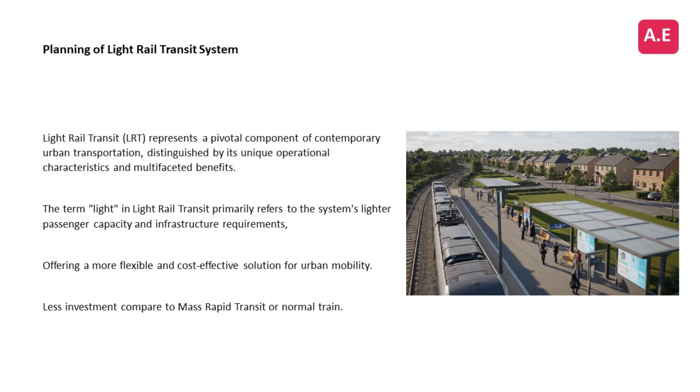Light rail transit, LRT, represents a pivotal component of contemporary urban transportation, distinguished by its unique operational characteristics and multifaceted benefits. Often described as rapid transit, LRT systems utilize electric-powered single cars or short trains that operate on fixed rails. The term light in light rail transit primarily refers to the system's lighter passenger capacity and infrastructure requirements, rather than the physical weight of the vehicles themselves.

This distinguishes LRT from heavier rail systems like subways or commuter rail, offering a more flexible and cost-effective solution for urban mobility. The historical roots of modern LRT can be traced back to traditional streetcar systems, which were common in the late 19th and early 20th centuries across Europe and North America. However, contemporary LRT is a redesigned evolution of these earlier systems, engineered for greater speed and capacity to serve larger metropolitan areas.

The concept of light rail as it is known today emerged in the United States in 1972, coinciding with a resurgence of interest in this mode of transport due to its environmental advantages and potential for urban revitalization. This modern iteration of light rail draws heavily from post-World War II German innovations, where many streetcar networks evolved into sophisticated light rail systems known as Stadtbahnen.

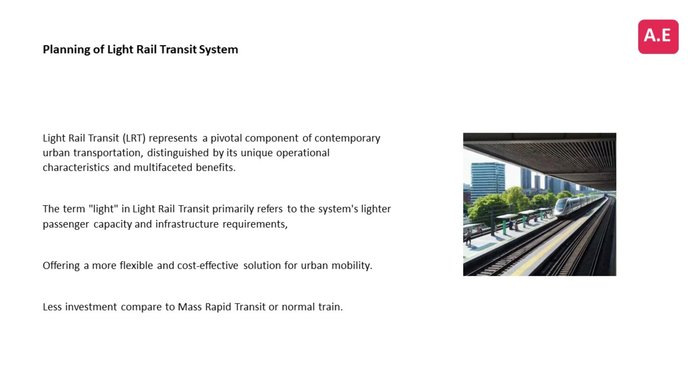The adoption of these modern LRT systems gained momentum globally, with the first of the new North American systems commencing operation in Edmonton, Canada, in 1978, followed by widespread implementation across numerous cities. LRT systems are designed to operate primarily on tracks, often in dedicated lanes separate from regular traffic, although some may run in mixed-flow streets. This dedicated infrastructure, coupled with features like special traffic signal systems, contributes to reliable travel times and smooth, comfortable journeys for passengers.

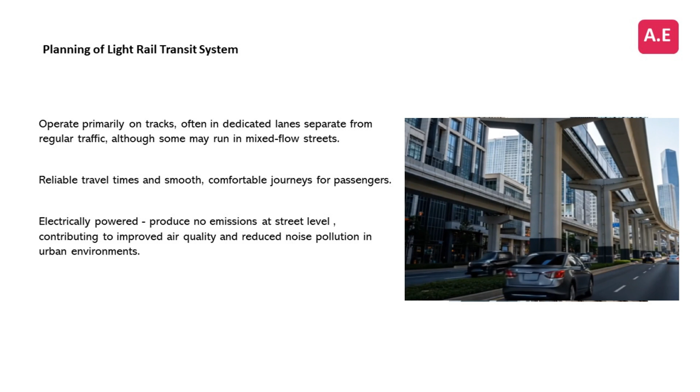Being electrically powered, LRT vehicles produce no emissions at street level and operate quietly, contributing to improved air quality and reduced noise pollution in urban environments. These environmental benefits, combined with their ability to reduce traffic congestion by attracting riders from other modes, underscore LRT's role in sustainable urban development.

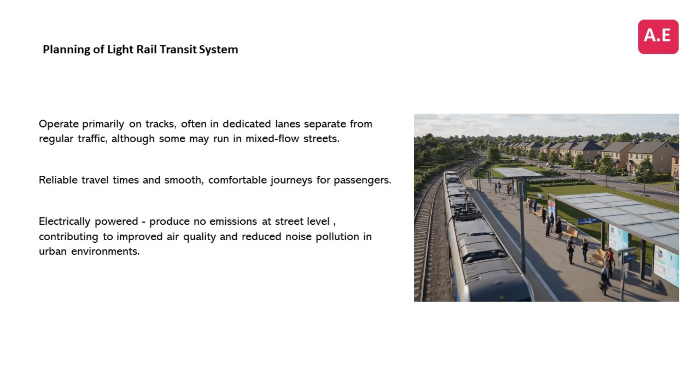From an economic perspective, LRT offers a cost-effective public transportation solution for high-volume corridors, requiring significantly less investment than highways, heavy rail, or commuter rail. Its capacity surpasses that of buses, including bus rapid transit, making it an efficient choice for moving large numbers of commuters. Beyond transport, LRT projects consistently stimulate local economies by promoting economic and land development along their corridors and around stations.

This includes enhancing property values and fostering mixed-use development, thereby contributing to urban regeneration and community interest. Furthermore, LRT systems improve mobility and accessibility for a diverse range of users, including those with mobility impairments, through features like low-floor vehicles and accessible stations, thereby promoting social equity and inclusion.

With over 400 cities worldwide now utilizing LRT systems, their proven track record highlights their critical role in creating attractive streetscapes and integrated urban transit networks.

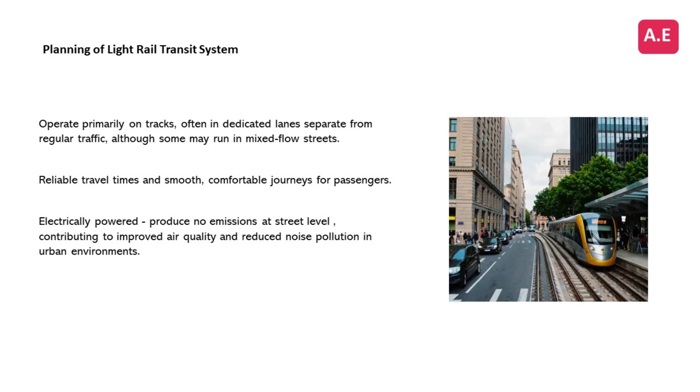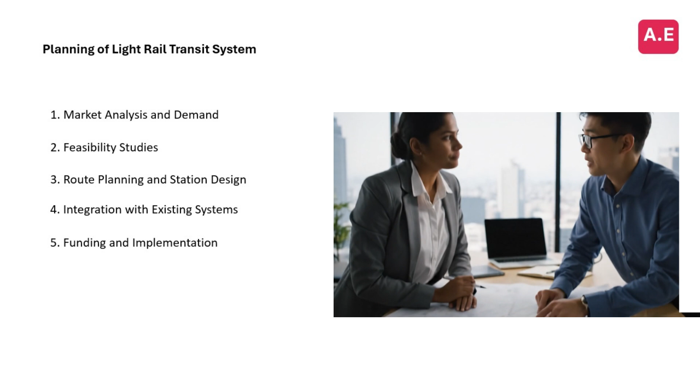The planning process for a light rail transit system is a comprehensive, multi-stage endeavor that lays the foundation for a successful and sustainable transit solution. It begins with an initial planning study aimed at determining the feasibility of the proposed system, structuring the project, and identifying necessary local commitments and funding availability. This preliminary phase is critical to ensure that the project aligns with community needs, financial realities, and technical possibilities.

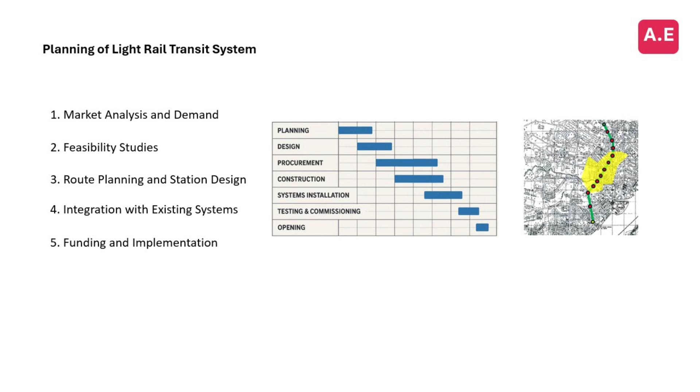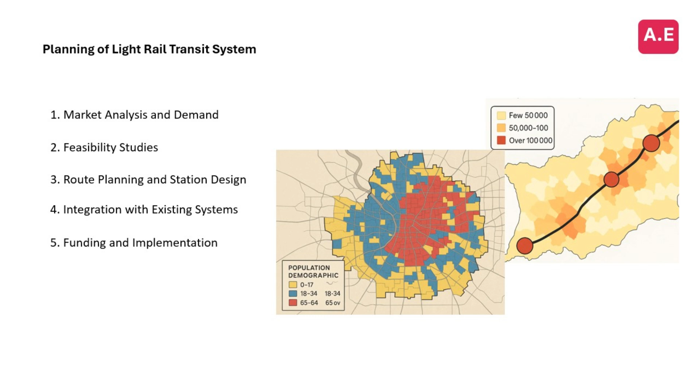A key early step involves conducting detailed feasibility studies and route planning. This requires assessing the demand for LRT services by analyzing population density, demographics, land use patterns, and existing transportation infrastructure. Environmental and social impacts are also evaluated to minimize negative consequences and enhance community benefits. Cost and funding options are explored to ensure economic viability. These studies help identify potential corridors where trips cluster in linear travel patterns, known as travel sheds, which are ideal for LRT implementation.

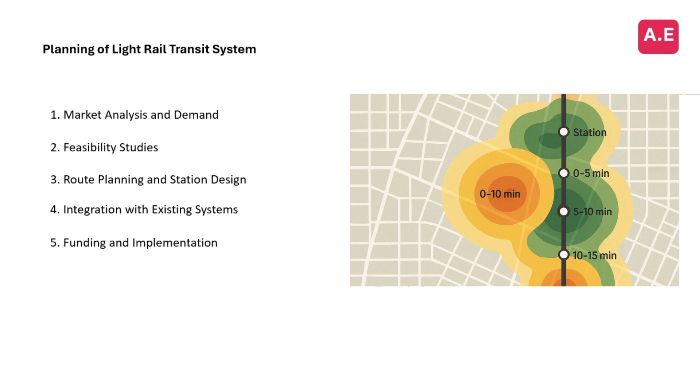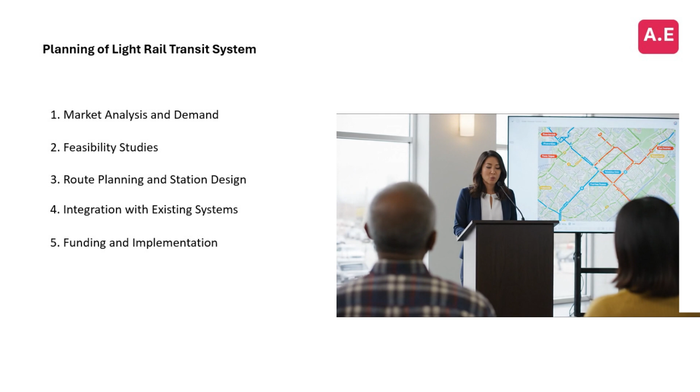Following feasibility, the conceptual design process begins. This phase includes developing preliminary concepts such as route alignment, station locations, and intermodal connections. Visualization tools like sketches and models are used to illustrate how the system integrates into the urban landscape. Public consultations are often held to gather stakeholder input and address community concerns early on. The conceptual design also involves technical, financial, and operational analyses to confirm project feasibility and explore construction methods and technology integration.

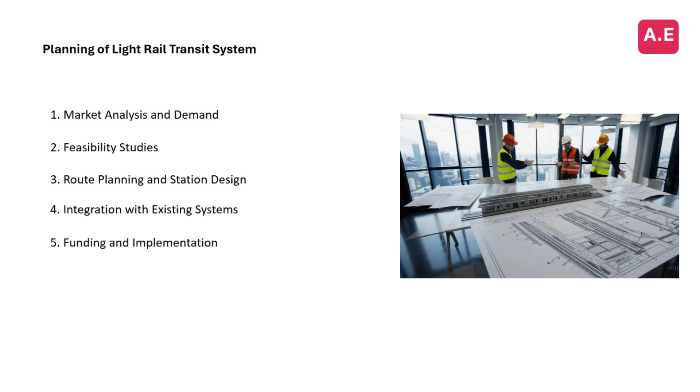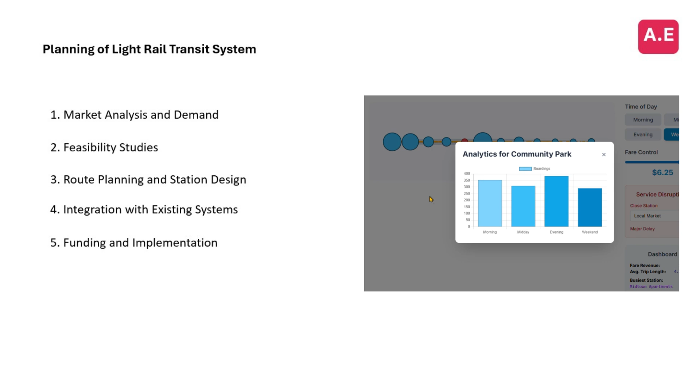Once concepts are validated, the planning advances to detailed design and infrastructure considerations. This includes specifying track layouts, station design, signaling systems, and vehicle characteristics. Station planning pays particular attention to pedestrian access, accessibility, and integration with surrounding land uses. Agreements with local developers and amendments to zoning regulations may be necessary to realize transit-oriented development goals. The design process is iterative, incorporating feedback from engineers, planners, regulatory agencies, and the community to refine plans and ensure they meet safety, reliability, and user-friendliness standards.

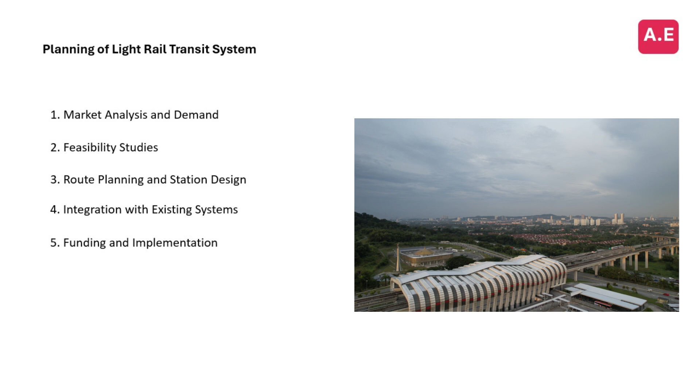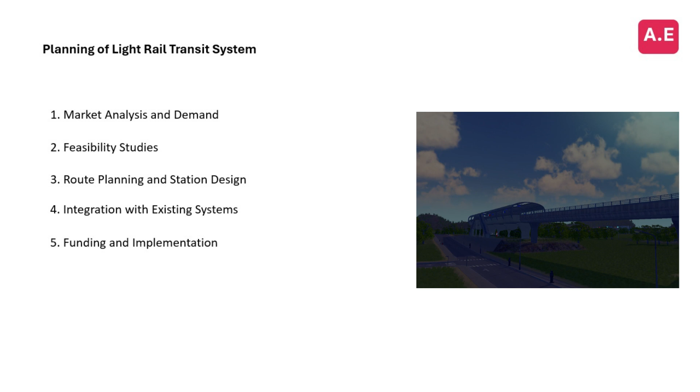In parallel, planners develop an operating plan and implementation schedule. This involves determining service frequency, scheduling to maintain uniform headways, and adjusting capacity based on demand and cost considerations. Integration with other transportation modes, such as buses, bike-share programs, and pedestrian networks, is planned to create a seamless transit experience. Strategies include coordinating schedules, providing clear signage, and implementing smart traffic management systems that prioritize LRT vehicles at intersections. Marketing and brand management strategies are also formulated to promote the new service and build public support.

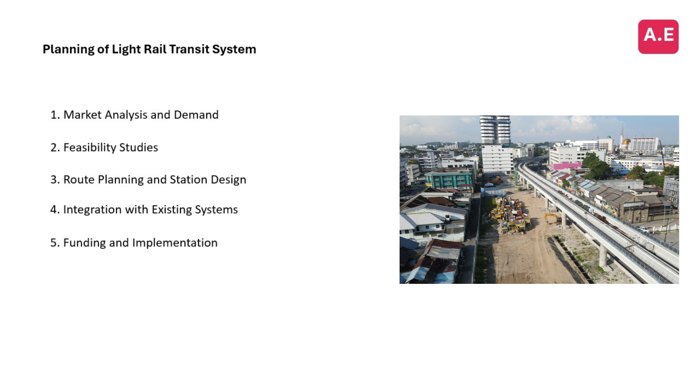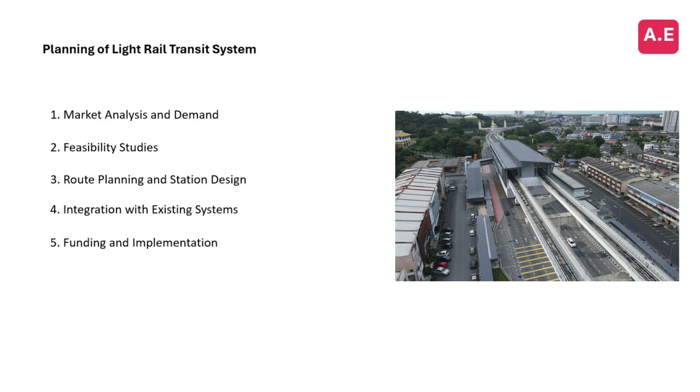The entire planning process is guided by sustainability principles, aiming to create an efficient, accessible, and environmentally friendly transit system that meets current and future urban mobility needs. In summary, planning an LRT system is a complex, phased process involving feasibility assessment, conceptual and detailed design, operational planning, and community engagement. Each step builds on the previous to ensure that the final system is technically sound, financially feasible, socially beneficial, and well integrated into the urban fabric. This rigorous approach maximizes the likelihood of long-term success and positive impacts on urban development and quality of life.